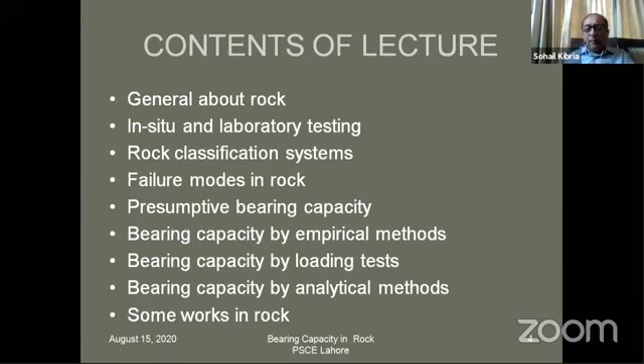So let's have a general talk about rocks. First, let's have a brief comparison of soil versus rock. You are more familiar with soil; we engineers have been trained to deal with soils more rigorously, which are unconsolidated materials where particles are separate and independent. In contrast, rock is a rather consolidated mass of minerals.

What's a mineral? It is a naturally occurring solid inorganic substance. So that is a mineral. You can consider a consolidated mass, particles assembled together.

I'm going to tell you a statement which is not always true: that the worst rock may be, in a number of cases, as good as the best soil. But this is not true. I've seen this statement defeated in case of very weak shales occurring in our Murree and Kohala area, and similarly in certain other countries we have very weak chalks, a kind of very weak rock. Sometimes sandstones are also very friable and very weak.

So we'll consider here in this lecture the bearing capacity with regard to shear failure, that is the ultimate limit state. I will not be touching the allowable bearing pressures with regard to the serviceability limit state controlling settlement.

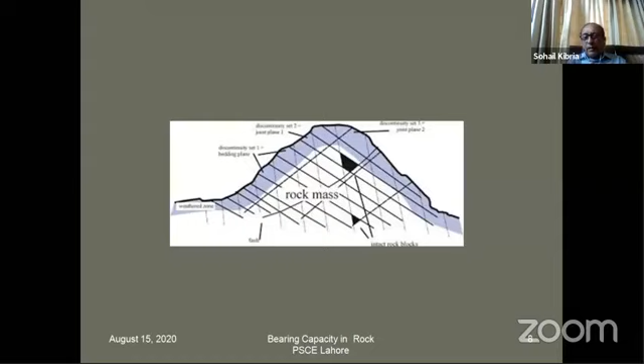In this slide, you can see a kind of hillock, a rock mound, and these black zones can be, if cored from there, the zone between different planes of joints or weak planes. You can see this set of weak planes and an orthogonal set of weak planes. In between is the uncracked or unjointed portion. This is the intact rock on which we are able to find out the strength properties in the laboratory. Otherwise, the whole mass is a rock mass.

Here in the figure also we have a bedded rock having joints, and you can see it has some fractures too. But if we manage to take the specimen out, that will give us the property of the intact rock, which will be higher than the rock mass itself, because an intact specimen of rock is stronger than the rock mass on the whole.

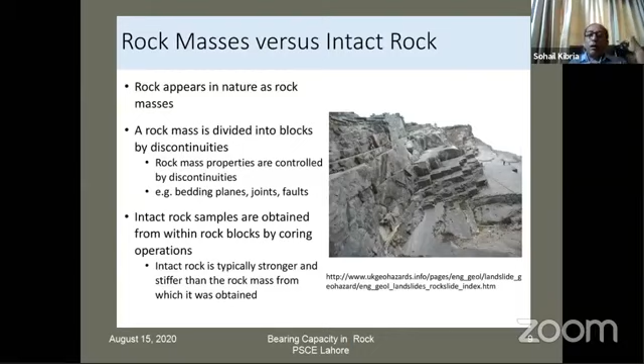Now, what is the role of these non-conformities, discontinuities, joints, weak planes, or cracks? Many names are given to this. The in situ rock mass has a lot of weak planes, and these range from fresh to badly disintegrated rock.

The behavior of rock mass under applied loads is governed by the interaction of intact blocks with the discontinuities. This means there are intact blocks between the joints, and those joints may be tight, without any gap in between. If a gap is there, then again there could be two situations: either the gaps contain air voids or water, or they may be filled with some material like clay or sand particles. That is called gouging, the gouged joints. So the behavior is different if the joints are open, or if they are filled.

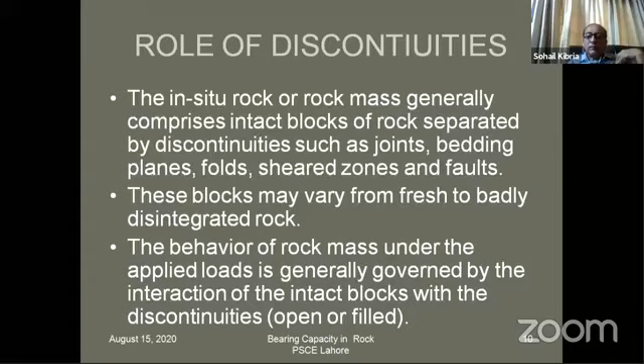Here in this figure you see the bedding planes, which in this case are horizontal, and you can see joints running like this. Joints may not always be vertical; they may be inclined at many angles according to the formation of the rock and the later distribution of stresses within the rock.

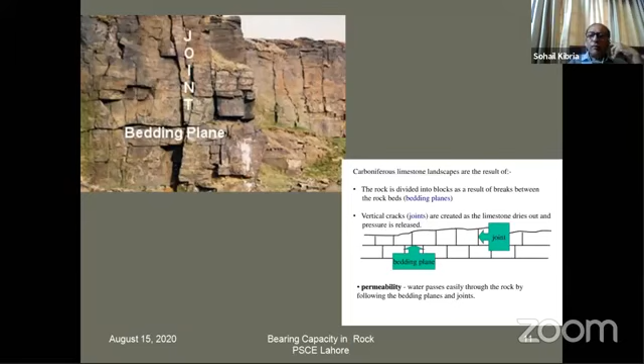The presence of these joints and weak planes increases the permeability of the rock tremendously. That's why in practical situations, we have to consider the effect of seepage and submergence on the system of foundations, because these weak planes can result in too much seepage, which can exert a lot of uplift pressure on structures through the foundations. So before moving ahead, I'd like to brush up your concepts on some very common terms: strike and dip.

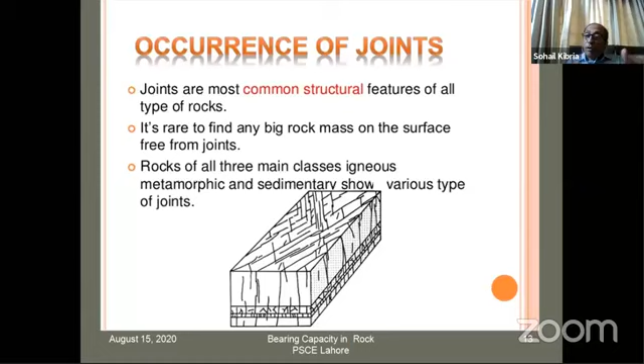In this model, you see that in the structure of the rock, many cracks are present. The presence of joints and cracks, their distribution, and how wide they are matters. The width of the cracks is called the aperture, the space between them is called spacing, and we also consider their direction, whether the joints are tight or not, and whether they are filled or unfilled. All this controls the engineering behavior of the rock under load and controls the bearing capacity.

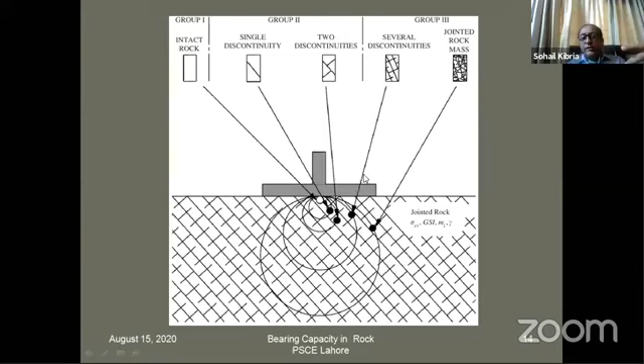So you can imagine that if this is a foundation loaded with a certain load, it depends on the spread of the load within the formation how much complexity we're going to encounter. If you take these circles as stress bulbs, then in the deeper stress bulbs, more variable behavior of the rock is met. Since the bearing capacity problem, related to shear failure, is confined to the upper zone beneath the foundation, these distributions become more important in controlling the bearing capacity under jointed rock.

So here I want to draw a line between what we call a continuous and a discontinuous behavior of rocks. When we have joints, the rock system becomes discontinuous, and this is of more importance. A jointed rock is more important to be considered as such in the sliding stability, because then the joints open up and the sliding may take place of the individual blocks, and bearing capacity in which the movement may get triggered along the joints or along the weak planes.

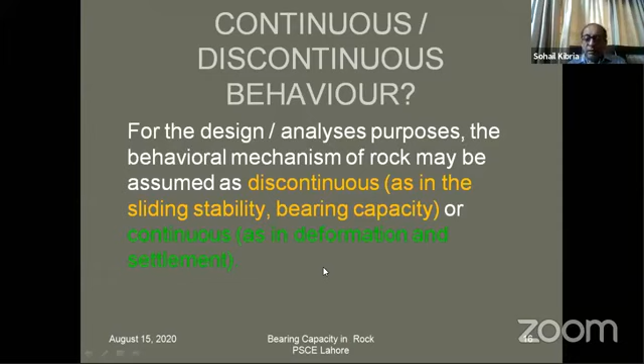On the other hand, we may consider the system to be continuous, even if it is jointed, when we evaluate deformations and settlement, because that is based on the average properties. And we don't expect some major movements within the rock because of the movement of the joints, the weak planes, and the blocks.

To have an idea here about the different kinds of defects in rocks, which have a control on the load bearing behavior: the inherent weakness of the fabric is not strong or hard enough because of incomplete hardness or incomplete induration—less time was spent, or sudden cooling was there if it was igneous rock. There are also structural defects because of the effect of stresses, due to thermal reasons and other physical reasons.

The defects in some cases get enlarged by weathering action and by the movement of water. In certain formations, particularly in limestone, some deep cavities have been observed. In the Middle East, where limestone is present in abundance, this is a big problem—whenever a tall building is considered, they have to find, by proper geotechnical investigation like electromagnetic surveys, whether a sinkhole or big cavity exists under the formation or not.

Because if we construct a structure and place the foundation on the surface, and underneath there is a cavity, in future that may collapse and result in a sinkhole, causing excessive damage to the structure.

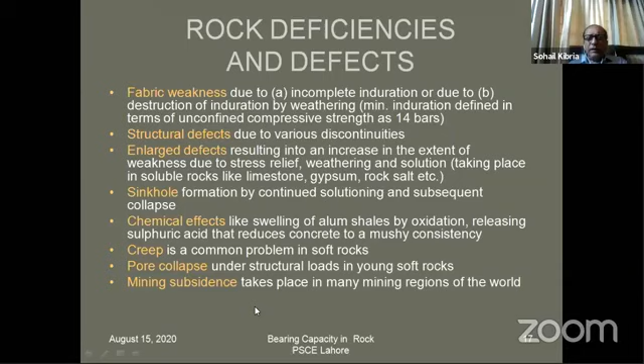So typically there are effects of chemicals and slow movement effects in weak rocks, in soft rocks, like in our Murree, Kohala, and Azad Kashmir area, where we have creeping shales in particular. Collapse of pores in young and soft rock is there, and some subsidences. So this gives you an idea about the kind of major defects which we expect.

So whatever I have said so far in introducing the rock to you very briefly, within the limitation of time—isn't it so that the rocks appear weird? They have their own style. So that is the reason that the design of foundations on rocks was largely empirical.

And when I joined the practice back in the 80s, I found that mostly investigations were carried out, but people were not much aware of how to utilize the results of the investigation. So in the end, in a nutshell, tables used to be opened from certain codes, and some presumptive values used to be adopted. So the practice has changed since then.

And now we know that we have analytical methods, we have better provisions in the codes, and we have numerical modeling as a tool also. But one thing I tell you, like in any other situation of modeling—also in soils—the results of numerical modeling, by running sophisticated software and computers, will be no better than the quality of the data which is plugged in. And the quality of the data has a lot to do with the in-situ testing, with the laboratory testing, and finally in evolving the representative properties or parameters for rock. That is really a very skillful job.

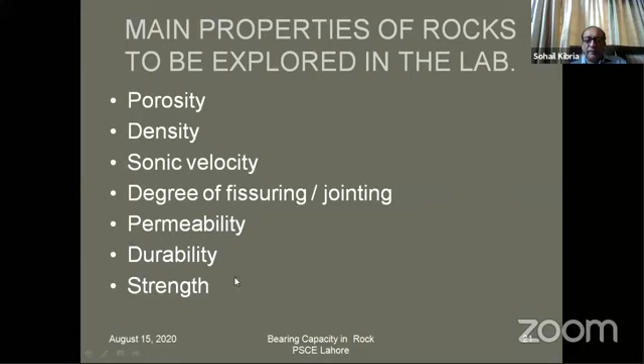How durable the rock is from a chemical aggressivity point of view, and how strong it is - these are the main characteristics required. To achieve these characteristics, these laboratory tests, as you see on the screen, would commonly be carried out for projects where foundations have to be placed on rocks: absorption of water, specific gravity, and durability of rock on exposure.

Some rocks get slaked when exposed - they get disintegrated. Unconfined compressive strength is one basic property, and there's another test which measures the crushing strength on an irregularly shaped specimen, called the point load index, also convertible into unconfined crushing strength.

Triaxial compression tests, like in soil, but they are not that common in rock - they are expensive and require a more robust arrangement. Splitting tension tests, like the split cylinder tests we carry out in concrete, four-point flexure to find out the flexural properties, the lab ring shear, direct shear, etc.

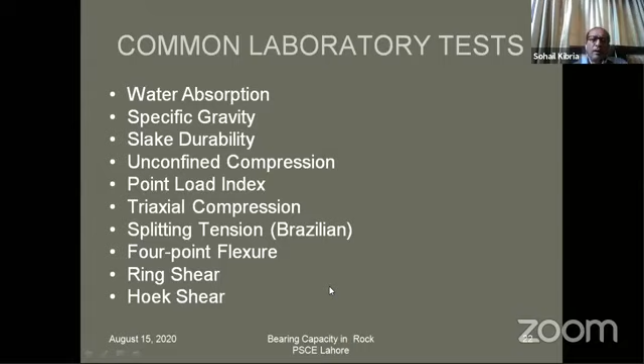So at least you know the names, those who are less familiar, and you can later search on Google or in standard literature, books, and codes to learn more. The purpose of my lecture is to expose you to many different things - this short duration cannot do justice to the topic. So you will be getting prompts, and later on those with interest can go and read more. Likewise, like laboratory tests, you have a series of field tests.

Depending on the type of project, its importance, and the budget available, one option is the flat jack test. When you jack a rock mass, you get load versus deformation behavior, and if failure takes place, you obtain the ultimate load.

Like we carry out plate load tests on soils, we also carry out plate load tests on rock at the surface, after breaking the surface, going a little deeper, or in the borehole at different levels using a small plate and a loading ram. The test mechanism and method of interpreting results are similar to what we do in soils.

It's also a good test for finding in situ shearing strength parameters of rock, called the in situ direct shear test. Like laboratory direct shear tests on soil at small scale, we put a confining pressure on the material and gradually increase the shearing load to find what load causes ultimate failure. It's large size equipment but the same principle, applied at site to find C and phi, cohesion and angle of internal friction parameters.

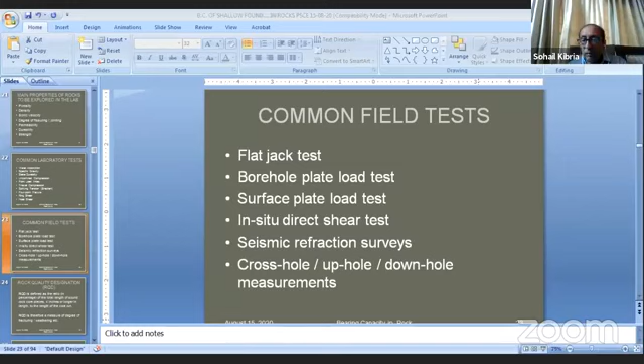So just a minute, now let me go into full screen mode. Yeah.

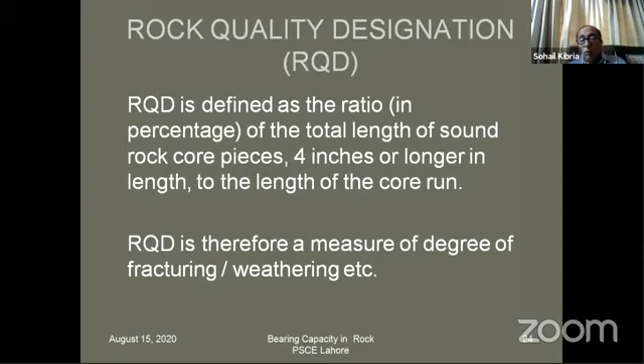Now let me tell you another common term, called RQD, abbreviated for rock quality designation. This is also correlated in literature and in codes to the load bearing capacity on rock, so it is appropriate I define this briefly. When we drill a hole in the rock and recover core, the coring operation is done in runs, say a meter or less than a meter, and we recover the core out, then the subsequent meter, and so on. The coring goes in steps, and we find the total length of the pieces which are more than 4 inches or 100 mm. We find that divided by the total length of the coring run, the depth of penetration of the coring run, expressed in percentage, is RQD. But if we have good quality rock, there is a likelihood that the total length of the fragments more than 4 inches will be more compared to a shattered rock. So it is an index of the rock quality.

Now let me jump into the question. These people don't write their correct names, they should write their names. Yeah, this is Omar Maqsood. Okay, he has written Omar Maqsood.

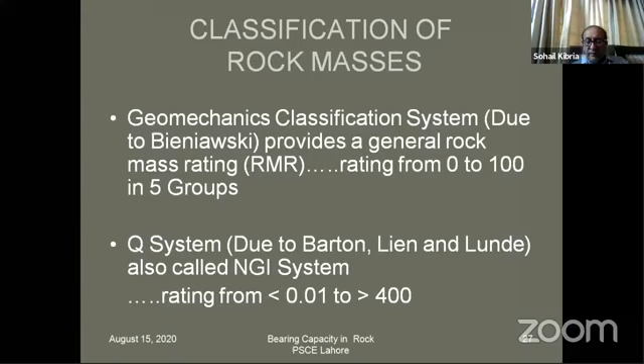The other system compared to RMR is called the Q system. This was developed by NGI, the Norwegian Geotechnical Institute, also called the Barton system. It is slightly different and unusual — the rating is from 0.01 to more than 400. It's like that. Let's go quickly.

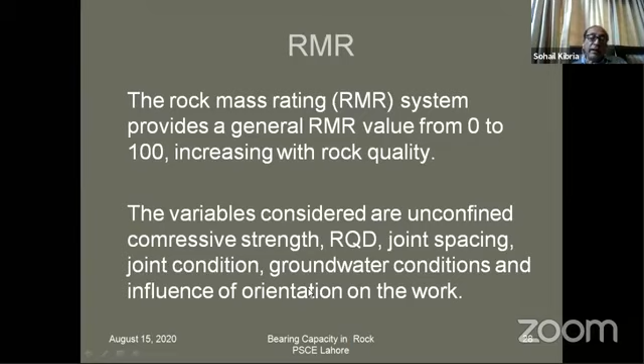The rock mass rating system goes from 0 to 100; the number increases with the quality and strength of the rock. So what variables does this system consider to classify the rock? One is the strength — crushing strength, unconfined compressive strength — the RQD which I've just told you about, the spacing between the joints (not the aperture or width, but the interval between joints, how far apart they are), the joint condition, the groundwater condition within the rock mass, and the influence of orientation of the joints on the work.

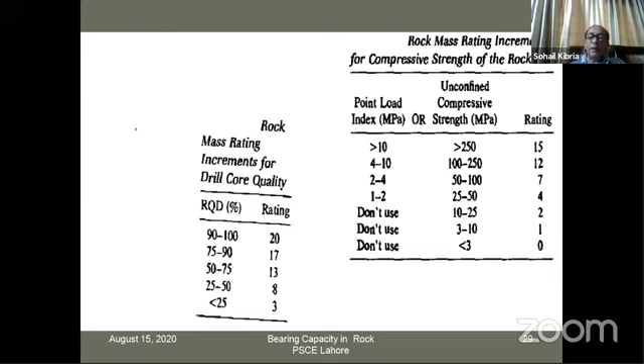Another question, please: on which criteria is bearing capacity calculated in rocks in which RQD is 0? Because UCS is not possible on such recovery.

Okay, what is the name of my friend? Umar Maqsood — Mr. Umar, you are going a bit ahead, please listen to the lecture; the remaining parts will give you adequate information on your question.

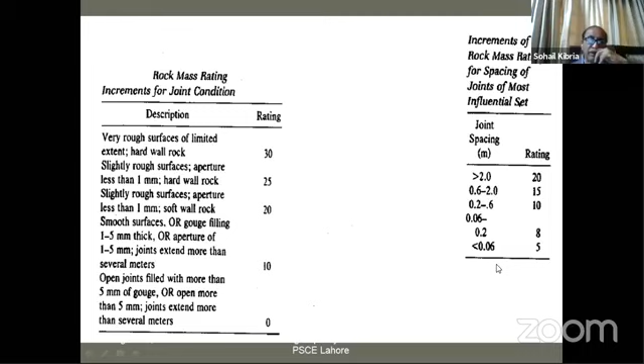I'll show you a relationship correlating rock quality designation directly with the allowable bearing capacity to be considered. So here you see the conditions of joints give this kind of rating, and here the spacing between the joints — wider the spacing, stronger the rock, hence higher the rating factor. As someone asked earlier about RQD being 0: when joint spacing is too narrow, the joints are close together, then no core is recovered — you get 'chura', all shattered. So the rating factor is low for that.

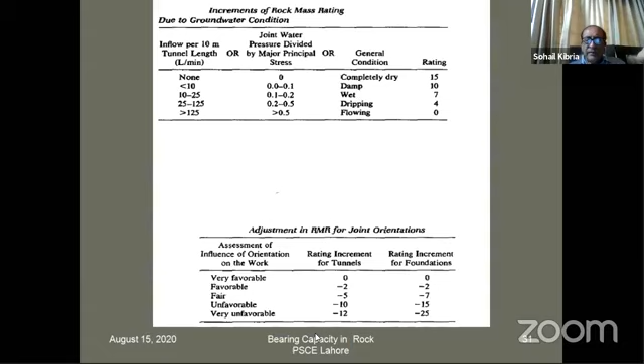Here is the rating factor for the groundwater situation — either this, or joint water pressure tests are carried out, divided by the major principal stress, and this gives the rating here. Similarly, when we assess the orientation and so on, we get this kind of rating. So you see, we add up all those 6-7 rating factors to result into one number.

That one number is called rock mass rating, and there are 5 classes, 5 categories, ranging from very good, 81 to 100, to very poor, 0 to 20. So this seems easy, but you've seen that it requires a rigorous study of geology. This is the area where geotechnical engineering, a branch of civil engineering, interfaces with engineering geology.

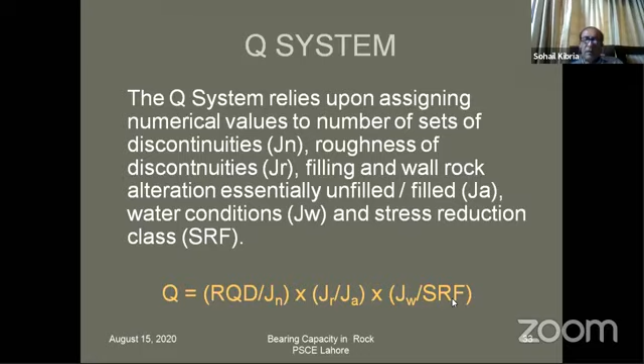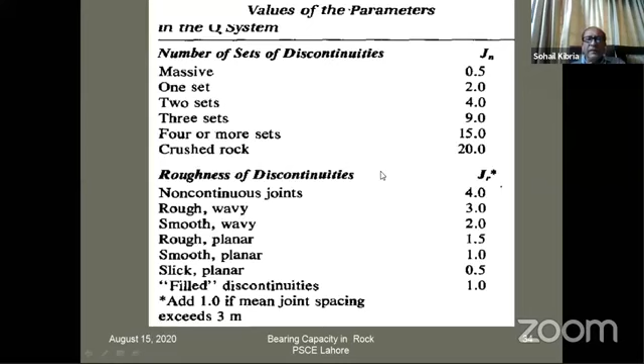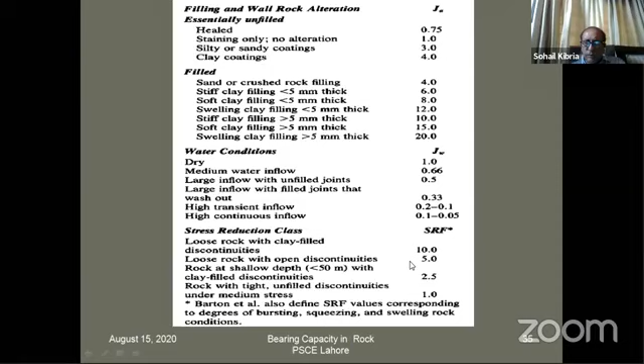To plug in these values, you pick them from here: RQD from the coring record, JN, and JR - you can see from rough joints to smooth, the values change, depending on whether they are filled or unfilled. What is the water condition - are they dry or containing flow of water? And what is the condition of the stress reduction class? Based on these values, you plug in these five or six parameters, but a detailed geological study is warranted at the site to find the rock mass characteristics. You get some value less than 0.01, rated as exceptionally poor, and more than 400.

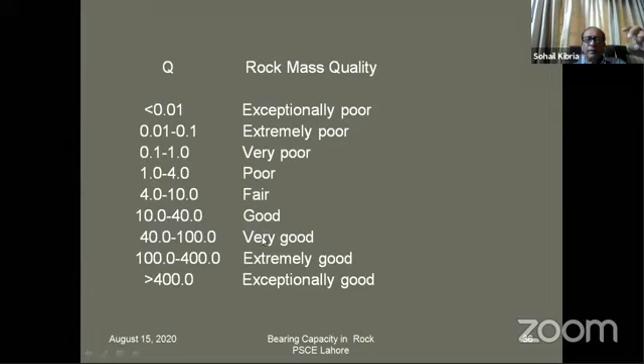How many classes are there? 1, 2, 3, 4, 5, 6, 7, 8, 9 - nine classes compared to five in RMR. So the Q system has nine classes.

So far we have discussed rock classification systems, and I'm gradually dragging you towards the evaluation of bearing capacity. It was not possible to jump into that straight away, otherwise you would not have understood a word of what I've been talking about. Now this is the last part before we start discussing bearing capacity directly: failure modes. The bearing capacity calculation in rock depends on what kind of failure is going to take place.

Imagine the rock system under the foundation has joints which may be closely spaced or widely spaced - spacing may be less than the width of the foundation, or more, or much more than it. There is a thickness of the joint, whether a few millimeters or centimeters, and whether they are unfilled or filled with some material. This changes the behavior. I couldn't get a better image and didn't have time to draw myself - that becomes a very rigorous exercise, but I think I'll be able to explain.

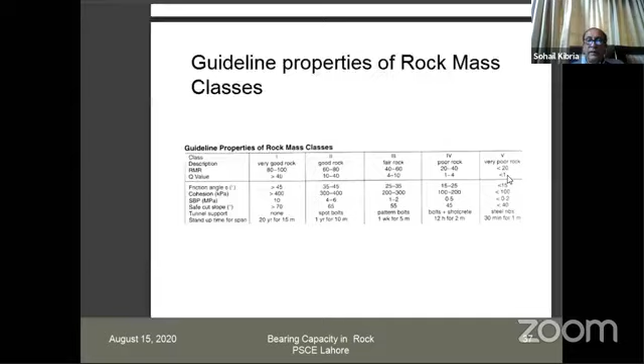I've explained the parameters to you, and this shows how RMR is correlated to Q, giving a feeling of the comparison. This is a rock classification system, like we have a soil classification system - in AASHTO we had A1 to A7, and in the Unified system SC, SM, GW, GP. This is that kind of rock classification system. It doesn't assign a symbol, but assigns a number - a higher number indicates stronger rocks in rock mass condition as found in situ, and lower numbers indicate poor rocks.

Now, these two failure modes I told you about pertain to intact rock. But rocks are not always intact.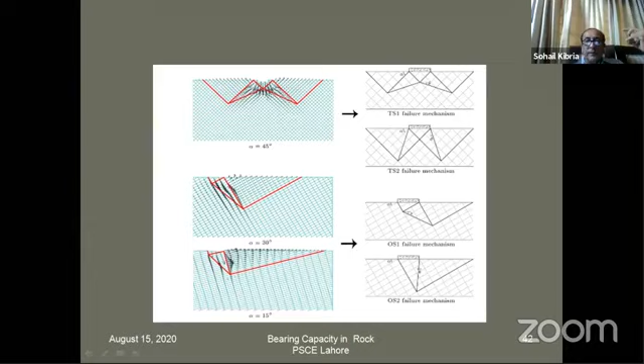Now I just give you a feel, I'm giving you different feels. Yeah please, Furqan has asked another question: is there not any standard system for classification?

Furqan Sahab, these are the only standard systems. They are not designed by Sohail Kibria, they are used the world over. I am talking of standard systems used in the best codes of the world. I've told you 2 systems. Go and do supplementary reading on this, this is the standard system. Now I'll ask you, why did you consider these to be non-standard? Please give your comment, meanwhile write a comment and I'll want to hear your answer to that, okay?

Look at jointed rock mass. When we have joints, for the sake of explanation, vertical joints are shown. Now the situation is either they can be opened with no filling in these joints, or they are gouged or closed, narrow, or filled in. Now there are 2 situations: one is that the spacing between joints is less than the width, so under the foundation you are expecting some joints. Had the spacing been more than the foundation width, and too much excessive, then perhaps many foundations of a structure would not have any joints underneath them, and that scenario changes.

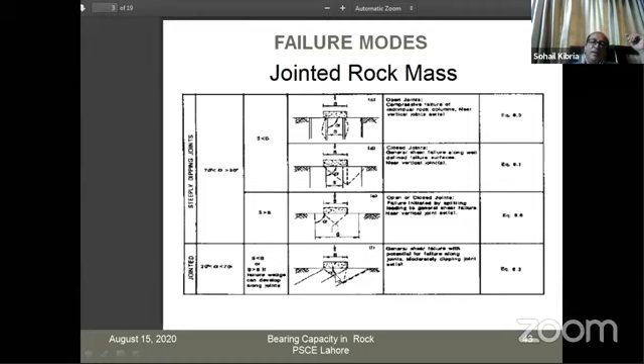Now, discussing the final figure here, where we have inclined beds, there's also a general shear failure mode, but the shear failure plane follows the inclined bed. This means the presence of the beds defines the shape. If this had happened earlier, shearing could have taken place earlier, giving you lower bearing capacity.

Likewise, when we have rock overlying soil, a rigid surface overlying a softer medium, when it is relatively thicker you can expect a flexural failure, but when relatively thinner you can expect a punching kind of failure - rock punching into the soil, foundation punching through rock going into soil. And again, this mode of general shear failure occurs when we have irregular surfaces in the rock mass.

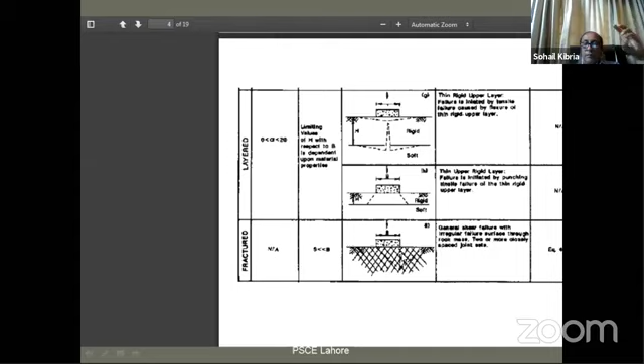Here you see, under intact rock, you expect A, B, and C are three different modes of cracking. This cracking, more severe cracking, results into crushing. And here, this is called a kind of wedging, which results into some sideways movement too.

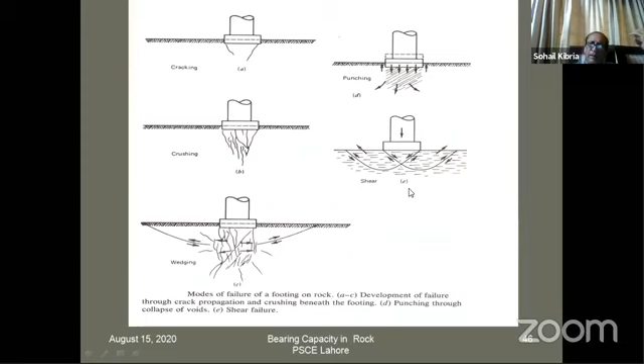Here, a weaker and more porous rock is likely to undergo punching, or a weaker layer over a stronger layer can undergo punching. And here you see shear failure of a rock-like soil, which is a weak rock or a strong rock. In both cases shear failure can take place, of course at different loads. I think we have already discussed these modes.

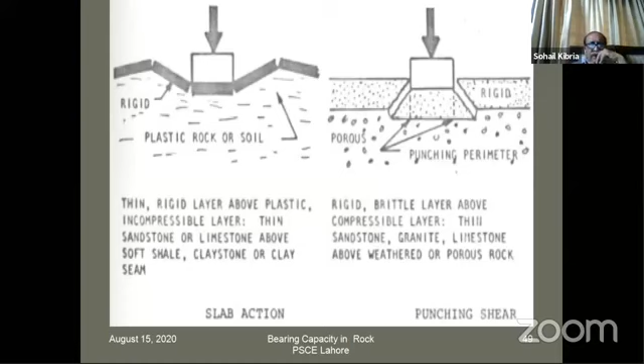Yeah, this is interesting. Here on the extreme left, a hypothetical shear zone may develop like this when closely spaced tight joints are there, or the joints are filled in. So it undergoes a general shear failure case.

But when we have open joints here, with nothing in between them, the loading will be transferred mostly to the blocks - a local shear failure case in which the separated rock blocks will receive higher shear stress and the failure load or bearing capacity will be lower.

Here the joints are widely spaced so that the spacing between the two joints is more than the width of the foundation, resulting in splitting. This kind of situation will also take place in intact rock because intact rocks will split.

Here you see there are pinnacles of rocks - pointed shapes on the weathered rock at the top - they will get crushed. So they've got to be removed for better placement.

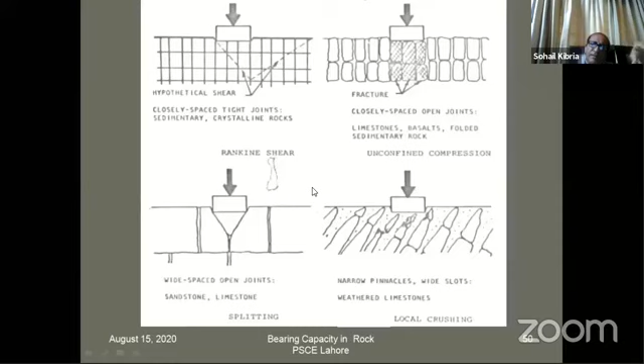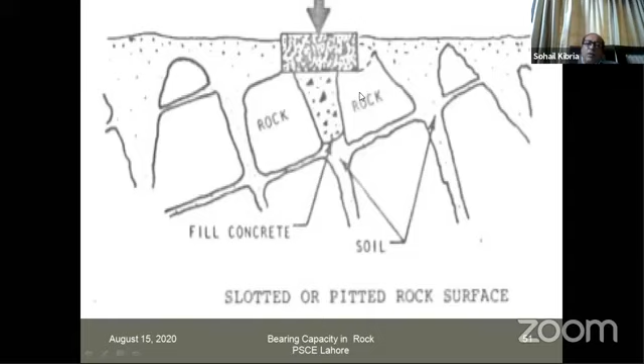It's not only that we evaluate bearing capacities in rock, we have to look at the condition of the rock and take some measures too, like providing bolts to hold the beds. Here, it's not only that part of the rock is chopped off to allow the foundation to be placed horizontally, rather lean concrete is also filled to provide proper bearing on the surface. Even if soil is there in between, it should be removed and replaced so that the modulus of the two mediums, rock and concrete, is not much different.

These are the common situations we come across when placing foundations on rocks, so foundations of one structure may be placed in rocks of variable conditions. Having said that, I think now you are ready to go with me into the venture of considering evaluation of bearing capacity of rock using different procedures.

First of all, the big comment is that the lecture is confined to the discussion on calculation of the bearing capacity concerning the ultimate limit state - that is the maximum pressure that can be put through the foundation onto the rock, which will initiate shear failure of the ground. We calculate the ultimate bearing capacity, apply a safety factor, and get an allowable bearing capacity to control the ultimate limit state. The ultimate limit state can be reduced to an allowable load by dividing with a factor of safety.

What factors have we already discussed, but just as a reminder, which will finally affect the bearing capacity. Things are not simple, it is a jargon.

Type of rock is one variable, the joint spacing, the joint width or aperture, whether joints are filled or unfilled, how many joint sets are there in different directions, how wet the rock and joints are, whether voids are present in the rock mass, how thick or thin the beds are, what is the angle of the beds to the horizontal (the dip), and what is the direction of the beds with respect to north.

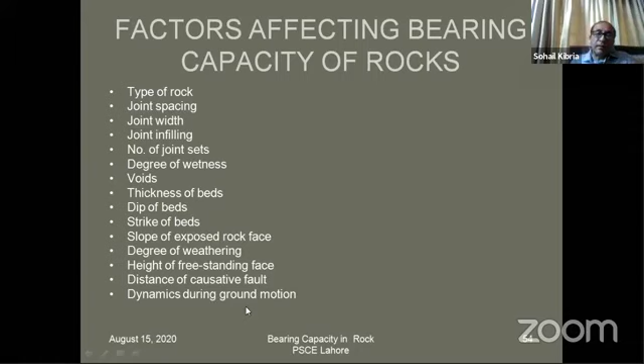Distance of the causative fault matters from an earthquake point of view - earthquakes are generated by faults at a certain distance, and the length of the fault and the distance determine how much peak ground acceleration could be generated, and the dynamics during ground motion. What kind of ground motion, how long it will last, the significant period of vibrations, and what kind of displacements it can cause into the rock mass on which the structure - a building, bridge, or anything else - is sitting.

I've already covered that even today building codes are used for presumptive values. Presumption is a term different from assumption. Assumption is just very much assumed. Presumption is the one for which we have some basis, some truthfulness - it may even be experience - so that is presumption.

So the codes give the presumptive value. It has some proven record of experience and success. And recent studies have given many other methods also.

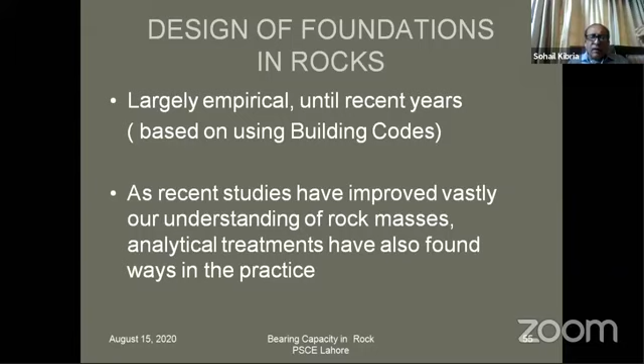Let us discuss four main categories one by one: building codes - how do they give the bearing capacities and how do they cover it; rules of empiricism, in which experience is used and certain correlations, graphs or equations have been given.

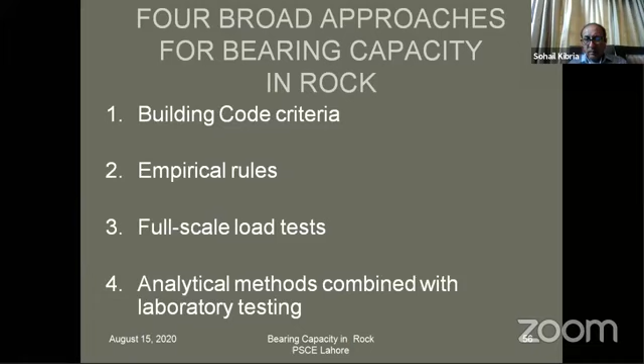The loading tests and analytical methods combined with laboratory testing. Analytical methods would cover the longhand methods as well as numerical modeling - you can include that, which is a rather recent inclusion.

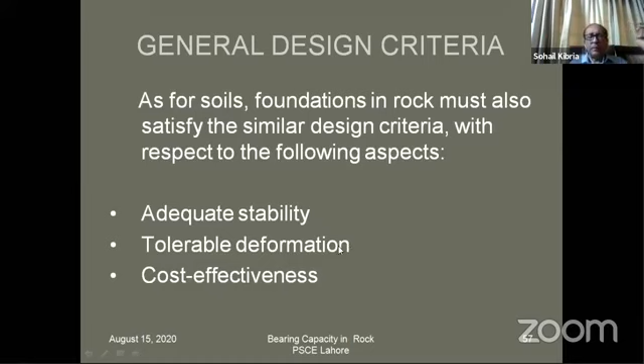So we know that when we say bearing capacity of rock has to be determined, it requires adequate stability, tolerable deformation, and of course the system has to be cost effective. Tolerable deformation is covered under serviceability limit state and will not be discussed here.

I would like to highlight one important structural aspect of rock, which is interesting - sometimes it is the limiting structural requirements which control the design. The size of foundation will be controlled by the minimum size of the column base plate or column at the base, and the size of the column is governed by the load from the superstructure. So even if a lesser size of foundation may be possible, we will not give a size smaller than the size of the column itself.

Similarly, there may be situations when we have stronger rocks and the concrete has lesser strength than the rock itself, as in very strong igneous rocks. In that case, there's an option to use high strength concrete and save in some other way in the structure. So the type of rock material and the superstructure itself are interrelated.

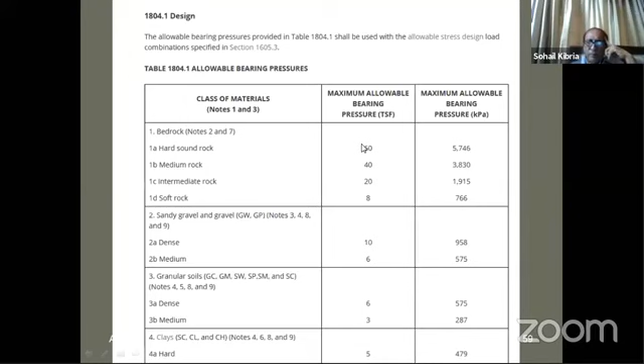Here I show you the rocks described more properly in a bit more detail.

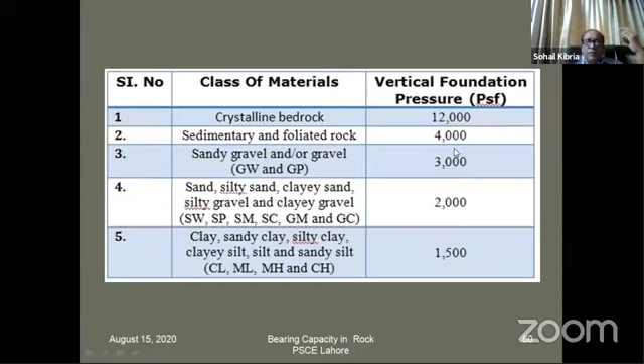Crystalline, sedimentary rocks - only 4,000 pounds per square foot, which is 2 tons per square foot. And you know that 2 tons per square foot or even higher is given for good soils. For gravel sand mixture, we sometimes give more than 3 tons per square foot, 4 tons per square foot. So here for gravel, this code is giving 3 tons per square foot. Anyway, this is the way they're giving values.

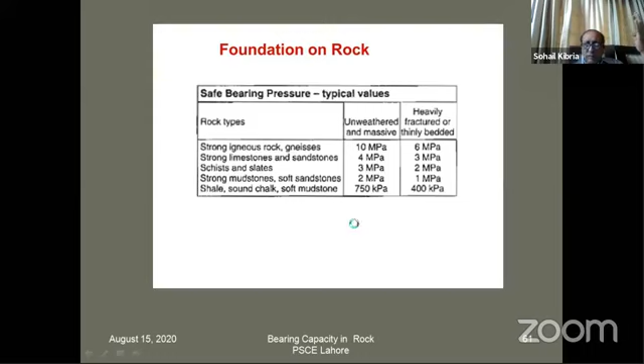So similarly here for igneous and sedimentary rocks, you can see the values of allowable pressures. You see 750 kPa means 7.5 ton per square foot. So many codes give different values. Here you see this is a more elaborate code. This gives you values for different rock types and categories.

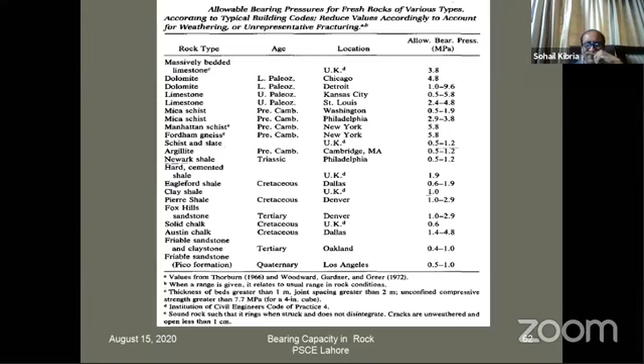So there are different codes now. That was a very simple way. There's another way where you know the spacing between the joints on the horizontal axis, and different kinds of failure theories exist. We see which failure mechanism or failure theory best suits, and find the value of n sigma. N sigma is simply multiplied by the unconfined compressive strength. So this is another way which is related to the thickness of the joint. It is, I would say, also crude because it doesn't consider whether the joints are open or gouged, but this is an approximate method.

Similarly, there's a Canadian practice which uses a similar approach.

Now this question is from Mohammed Imran. He's asking, does ground improvement is necessary for rocks?

Ground improvement is a term which is normally used for improving the strength of ground or soil. When we have to improve rock, as I've been talking earlier and shown you some slides, the rock needed improvement - concrete had to be filled replacing the soil, or the narrow pointed pinnacles had to be broken and proper bearing surface provided, or when the beds are unfavorable we may even bolt them. Sometimes grouting is done, and sometimes we provide wire netting on the rock surface, and sometimes we sprinkle lean concrete with small pea gravel size coarse aggregate - that is called shotcreting. So we prevent weathering and water ingress from the top. Sometimes we also provide good drainage measures within the rock mass to improve its strength and durability. So these are all rock mass improvement measures you can call them. You're right that ground improvement or rock mass improvement measures have to be there.

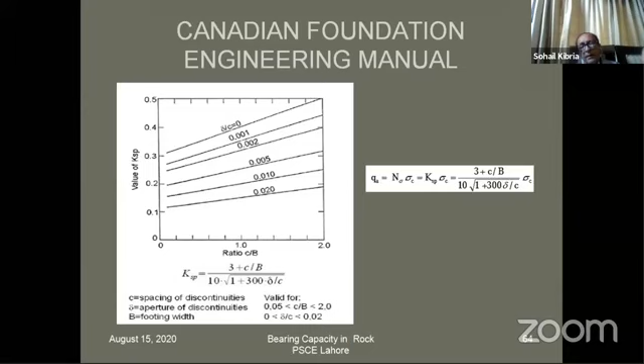This is also code's way. Now let's see - this is also in a way a presumptive method, but with some calculation. It's a better calculation in which they have included quite a lot of joint conditions.

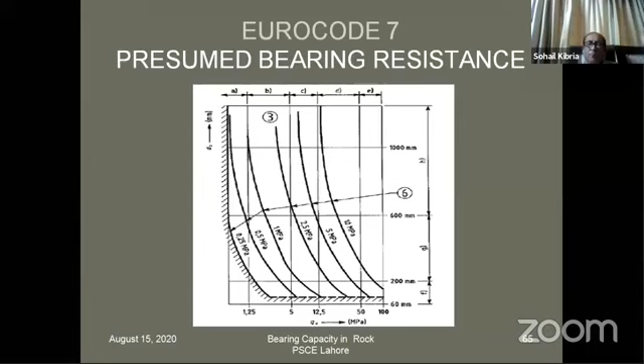Here's another one - Eurocode 7 uses this kind of method. It says that you have the spacing between the joints and unconfined compression strength, with different curves given. You see this versus this, and read the allowable pressure at the base. These are different methods which are simple, quick estimations.

Now some questions were there earlier about how rock quality designation has been correlated with allowable bearing capacity or allowable bearing stress. Here you see it is pioneering work done by Peck et al. and his colleagues in '74, and it is considered reasonable. It's a relationship using this equation, which is self-explanatory. It says to use maximum allowable stress less than unconfined strength - don't let it exceed that, even if the unconfined compressive strength is higher. If your allowable stress comes out less than this, use the lower value. Q is the unconfined strength, right? Yes.

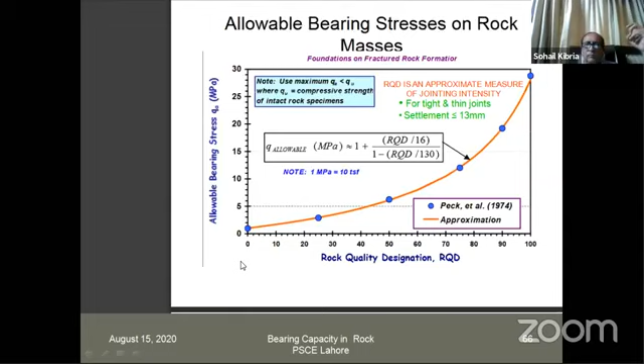I think this is interesting - this is empirical, how RQD and rock mass rating classification, which I told you earlier, is used for finding bearing capacity quickly and empirically in formation. This is the relationship given in the literature to convert rock mass rating. If it is 40, you get 1.4 MPa, which means something like 14 tons per square foot.

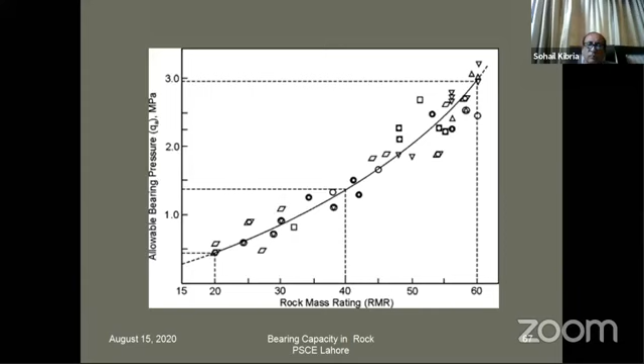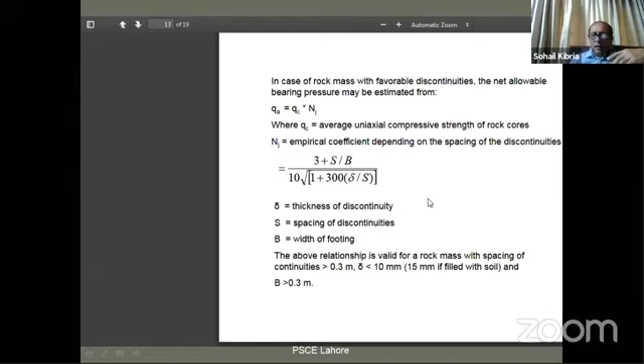And calculated values require some adjustment for these groundwater conditions and cavities.

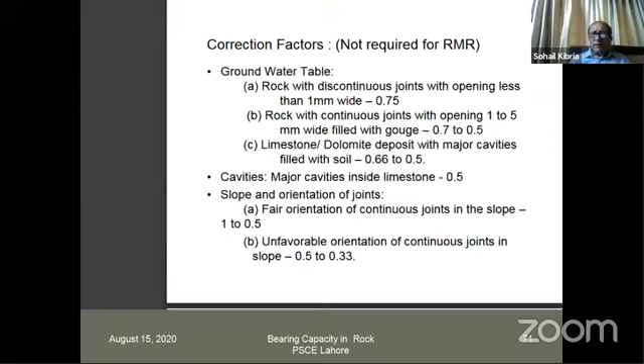And here, just briefly, I'm touching rock foundation problems, some of the problems.

So you see, if you have a structure - a bridge, a big building, or a series of buildings - like I came across different kinds of situations for placement of rock foundation when the NUST campus was being developed in Islamabad, virtually under every building and every foundation there were different rock conditions. So that was very challenging. I had to consider every structure and its every foundation carefully, separately, to determine whether it requires some treatment or not, and if it requires, what kind of treatment.

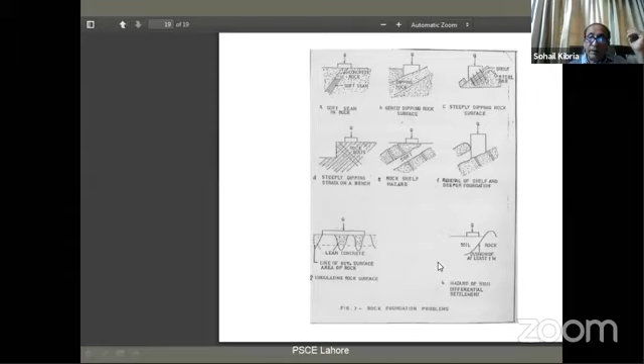Here, when we have a differential weathering kind of situation, the weak material has to be removed. This is called sometimes dental treatment - like a dentist gives treatment before making his operation, we also make a bearing surface by doing dental treatment. So here you see soil and rock - the hazard of high differential settlement is there, so steps have to be taken to remove the difference between the deformation capability.

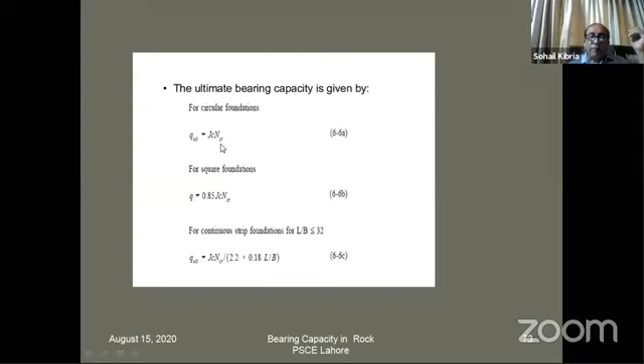These sets of equations correlate the ultimate bearing capacity with parameters J, C, and NCR. J is the correction factor, which is dependent on thickness of the foundation rock and width of foundation length. C is the unconfined strength, and NCR is determined by an equation when we have knowledge of the spacing between the joints and phi.

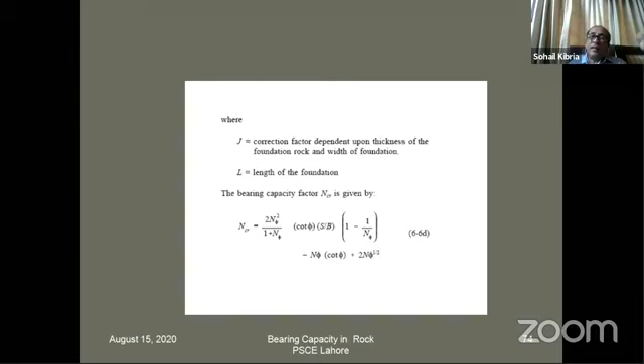So you see, there's a wide scatter of methods and procedures available. I would say that for a given situation, for relatively young engineers or with less experience, unless you have your own database and your own experience record to guide you, you can calculate the bearing capacities by a few different methods and pick the least value. I think that is one good approach.

Another good approach is that when you have so many codes and so many books available, a principle applies in common civil engineering too: go with the latest, most credible code and the latest books. Don't use old books and old theories, they are outdated. Use the latest practices, don't use the old practices, because there is a difference between the two.

There's a new trend which has come up in geotechnical engineering and in rock engineering also, called linear genetic programming. You can Google and read what is LGP. It is basically prediction versus performance evaluated, and on the basis of that, it's not only the theoretical value of the bearing capacity, but the bearing capacity is adjusted on the basis of the prediction versus performance relationship.

So this is an interesting field, and I think this is as per the requirement of good engineering practice, where we have some record of performance, or where we can collect some performance data of earlier works in similar situations.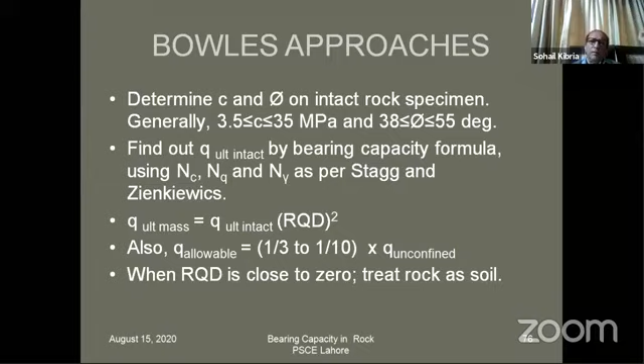Bowles also says, look at this, that when RQD is 0 or close to 0 - meaning we are talking about very weak and very shattered rock - then we can treat rock as soil and apply the theories of soil mechanics. Then you forget about the rock itself. I believe I've already talked about this.

That's Bowles' method, okay. I agree with the feeling of some of you that Bowles has some critical mistakes in some places - not in the context of this rock topic, but in the context of some other topics.

Now, these are the documented methods. One good method is the Raphael and Goodman method, used in India. Earlier I was discussing properties of intact continuous rock, but now it's with joints and discontinuities. Estimate phi of the rock mass, find unconfined strength, and using this relationship, multiply unconfined strength with N phi, which is defined in terms of angle of internal friction. So bearing capacity will be higher for a continuous rock mass.

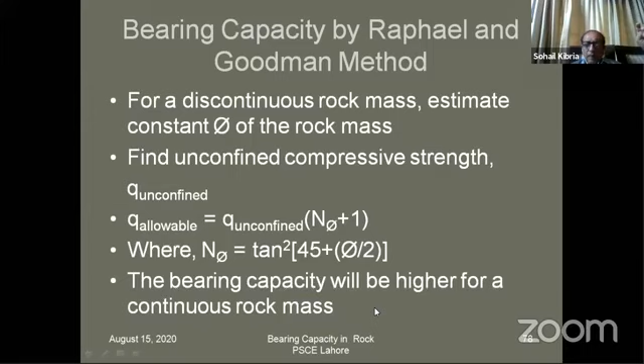All these methods, in the end I will tell you about those given by codes. Right now I'm taking from different literature, but in my personal opinion the code methods are much better, because information for engineers that comes in a code has been tried and tested through performance. So the codes are the most reliable source with third degree accuracy.

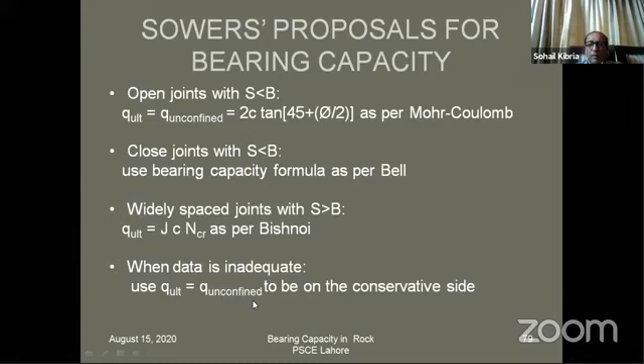I have already discussed widely spaced joints, where the foundation width is less than the spacing between joints. When data is inadequate, as Bowles also says, you can take the ultimate bearing capacity as equal to the unconfined compressive strength, and of course you have to divide by the factor of safety.

Now, out of all these methods, I'm going to give you this procedure, which in my experience is very good, more representative, and more simple. It is the AASHTO method. They have given this method for design of foundations of bridges, but I believe the same can be used for design of foundations of buildings and other structures too.

The method is based on tables, considers rock jointing, their spacing, rock mass rating, RQD, unconfined compression strength, etc., and just requires multiplication of two variables. This is a very standard method. Let us see what NMS and C0 are.

It also considers the classification, the rock mass rating. That's why I intentionally included the topic of rock mass rating classification in this lecture, so that you are at least familiar and exposed to the classification system. It's not difficult at all, but it has a relationship in many approaches to evaluating the bearing capacity of rock.

Now let us see what NMS and C0 are. First, C0 is nothing but the unconfined compressive strength. You have to decide this. If you have test results, good. If you don't, we can decide using the given ranges for different rock types, where group descriptions are given, whether they are carbonate, argillaceous, arenaceous, or other.

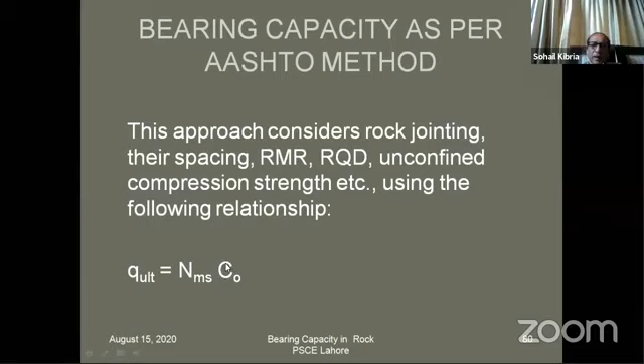I will multiply this NMS value with the unconfined compressive strength to get the ultimate bearing capacity. This is how AASHTO wants it done. AASHTO is a very much recognized code, and I think this is based on a lot of database and research carried out by them.

You saw that this is quite different from the other methods. This method is quite different, and it's not a bad method.

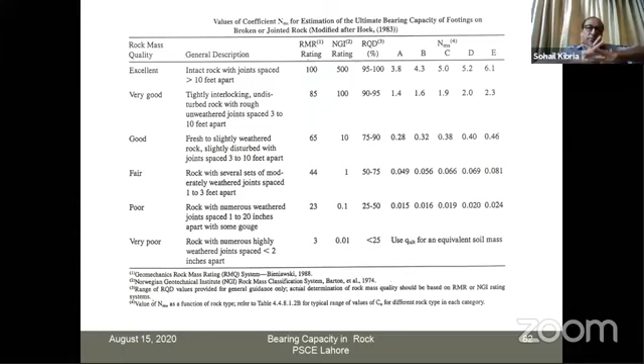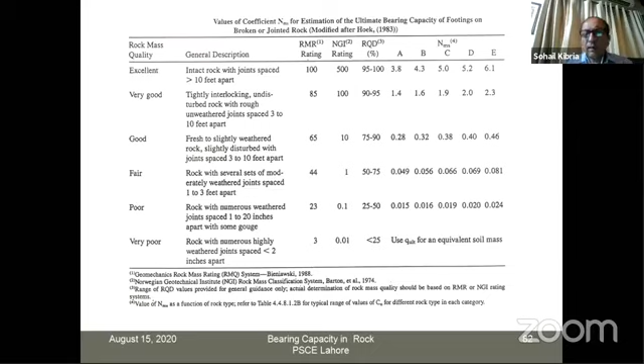Any other question? A little ahead, I'll show you some pictorial information. I'll show you some pictures of sites with rocks and give you a description. Any question? Nothing? Okay, so we go ahead.

I've listed only some of the projects where I came across rock and challenging situations. One was while dealing with the design of bridges on the Karakoram Highway project.

Rocks along the Karakoram Highway differ from rocks elsewhere in the country in that they are mostly igneous, resulting from solidification of molten lava or magma. When it comes out of the ground it's lava; when it solidifies within the ground it's magma. Sedimentary rocks that undergo pressure and heat treatment become metamorphic. So there are also some metamorphic rocks like hard slates and schists along KKH. Basically we have igneous and metamorphic rock there.

From a bearing point of view, situations for bridges were generally variable but not very difficult, except where the beds had unfavorable dips and rock fall or rock toppling could occur, which had to be avoided by recommending bolting or shotcreting.

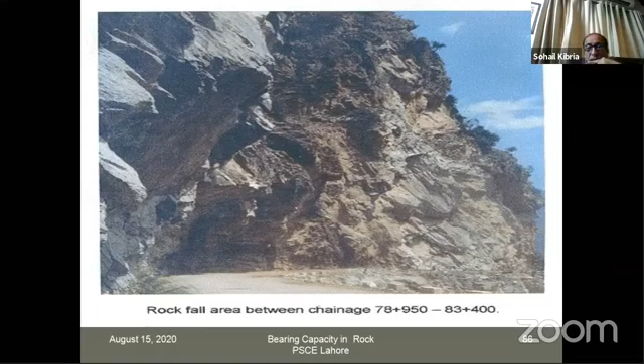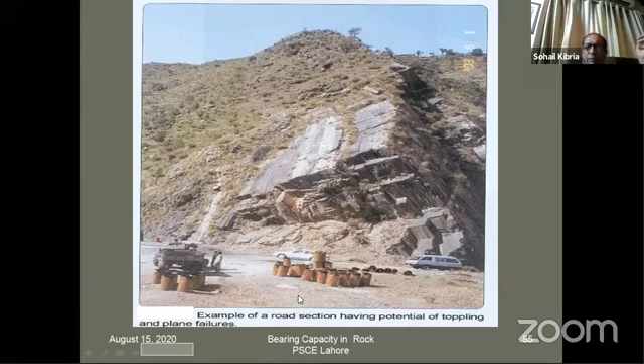So I proceed ahead. Here you see simply rockfall. I think you understand the difference between rockfall and rock topple. Here I use the word topple. When there is a fall, and when the particles fall a bit away, that is toppling. They turn during fall, they turn around and then fall. But when there is a straight fall under gravity, that is falling, resulting into residual deposits.

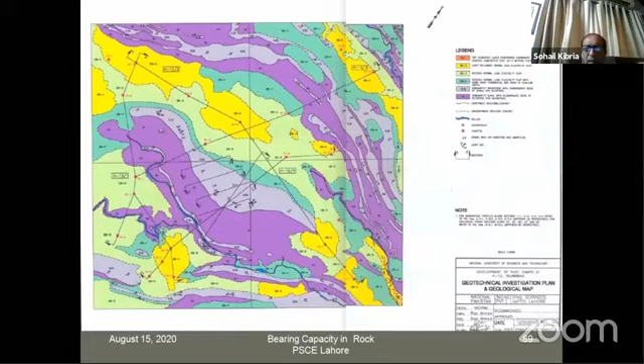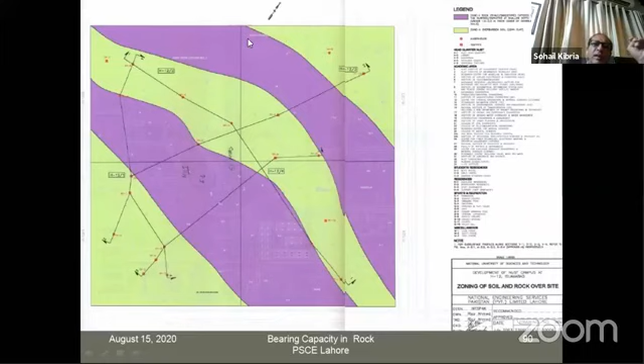These have been plotted on the base topo survey map to result into these geological informations, and they have been simplified by dividing them into two zones. Zone 1 is rock of shale type, and zone 2 is the other type, which is a cohesive material. So rocks are in principle in the purple zone. The structures which are falling in the purple zone, they had basic issues of rocks at the NUST campus site.

This question is being asked by Mohsin Gondal, and he's asking, is there any dynamic analysis included in your lecture for a railway line BC analysis in the Quetta Taftan region? Is there any dynamic analysis of rocks? Why should we check or include that in our study?

Vibrations are important, they result into deformations. One can prepare a dynamic model where the things are important, where the project is important. Some representative dynamic parameters should be plugged into the relevant analysis, in the SAP model, the structural model, or some other model like a Plaxis model, some numerical model, to find out the extent of deformations, because deformation will become important. Unfortunately, my lecture does not include dynamics, because it's a limited time lecture. I cannot include each and everything. I've already tried to squeeze a lot of information, and some of you might be getting bored because of the inclusion of a lot of mathematics, which I try to keep to the minimum.

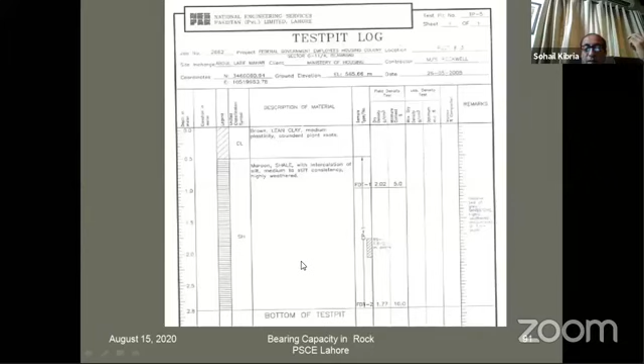Here in this G-5/2 COMSATS building in Islamabad, you can see the coring run. Every run is about 1 meter long. 3 to 4 meters is run number 1, 4 to 5 is run number 2. So coring is done in several runs.

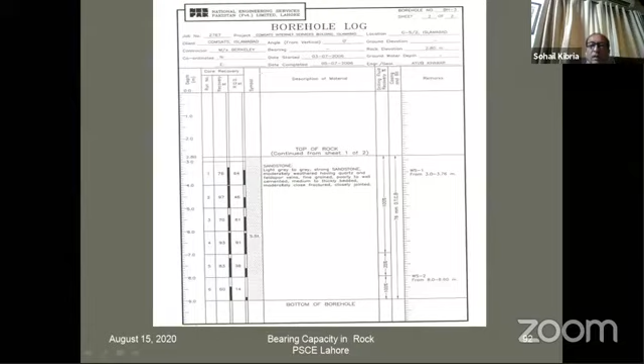Thank you very much. This is the end of the lecture, and now I would welcome some questions, more questions, although many questions have been asked. Please come out, speak out if you have some other things in your mind.

It's a very intriguing, very detailed, very complex topic, and I know, perhaps despite my best effort, a matter of 2 hours is less time and one cannot do justice. Even in a one day course this would not be covered, it would need a full long course to teach properly.

I have tried to touch so many things to open your vision so that you can make self-reading. In my experience, I have seen that when one is exposed to one small concept or idea, one can then visualize, and with the help of literature, make self-study and go further ahead. So that was the purpose, to train you that when rocks are there, you must not just raise your hands and say we are helpless, now what to do. I think you now have enough gunpowder to take some decisions yourself and get the guidance of your seniors.